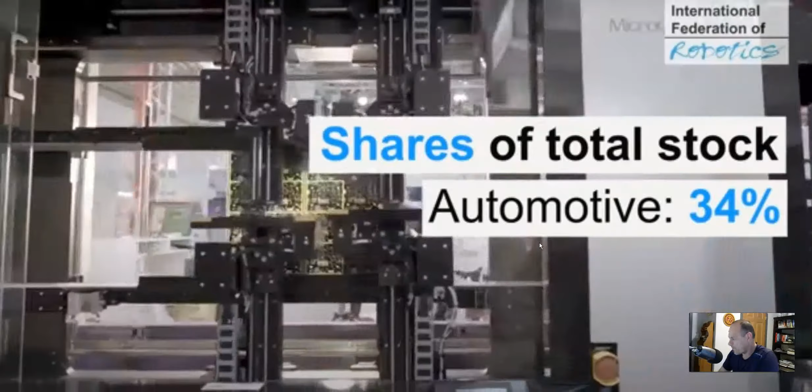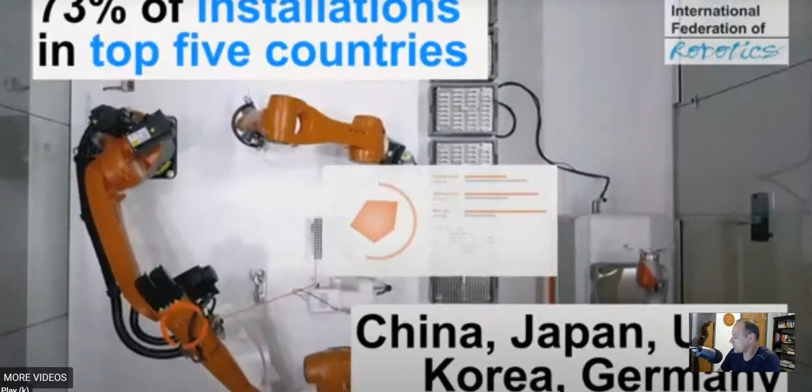More than 2.7 million robots operating in factories around the world. Automotive stock 34%, 25%, and automation value of new robots is 13.8 billion. China, Japan, USA, Korea, Germany - 73% of installations in the top 5 countries.

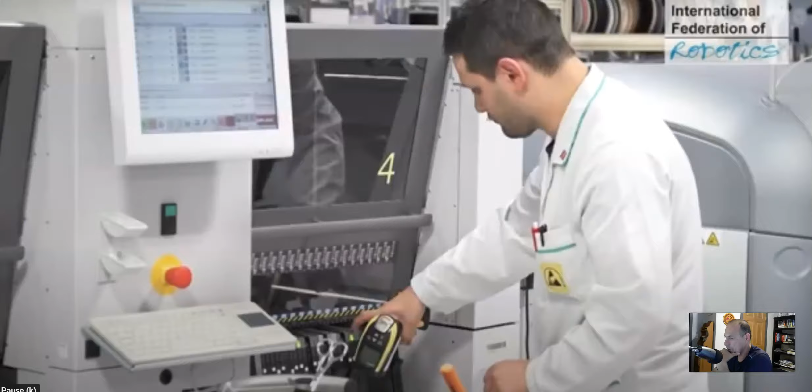Cool stuff, isn't it? Robot density worldwide in the manufacturing industry is 113 robots per 10,000 employees. That seemed like a lot, but they assist, right now they're assisting production lines.

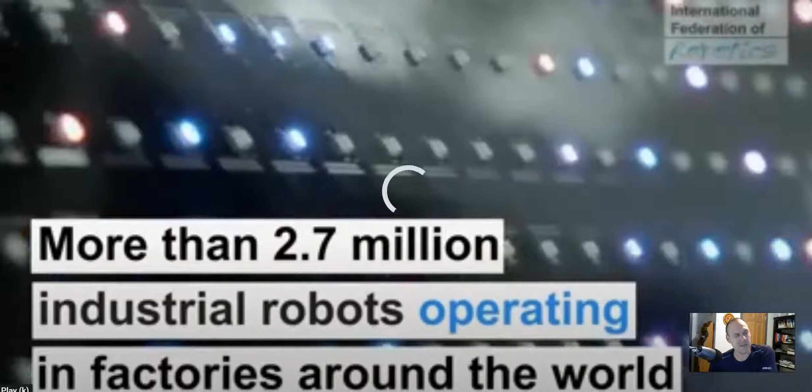Most of the time they're not, though. I did work with Ford, as a production supervisor on the Ford 500 production line, and we made the A-pillars. We had 16 robots on that line that assembled the A-pillar. So, lots of robots on that line, but that's not common. So I had to stop it and start it.

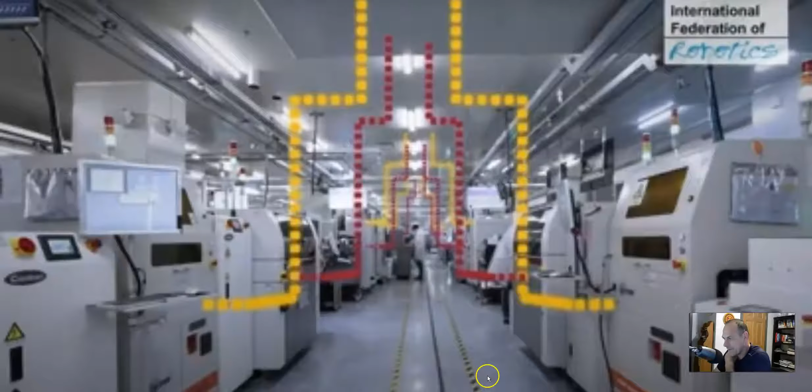So robot density, top 5 countries - we can name them: China, Japan, United States, Germany, Sweden, Singapore. Okay, Singapore, I stand corrected - Singapore or Japan. All right, so a short little video there, pretty interesting stats.

So I like to dig into this a little bit. What we're going to do is go down here to the presentation, I think it's a good place to go. This was put out in Frankfurt, September 24th, and we had a couple of speakers at that. So the IFR is a nonprofit organization since 1987.

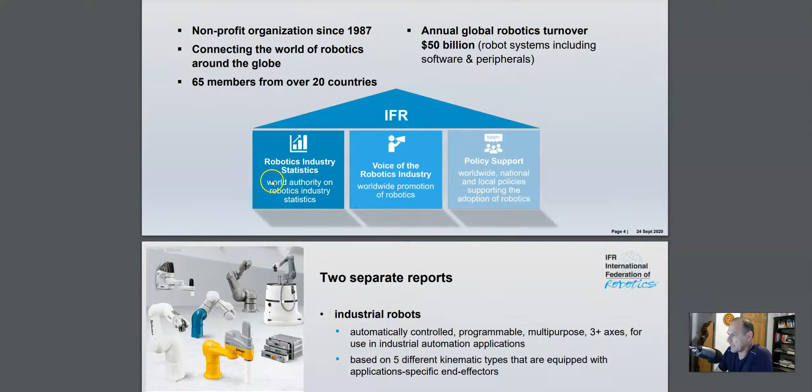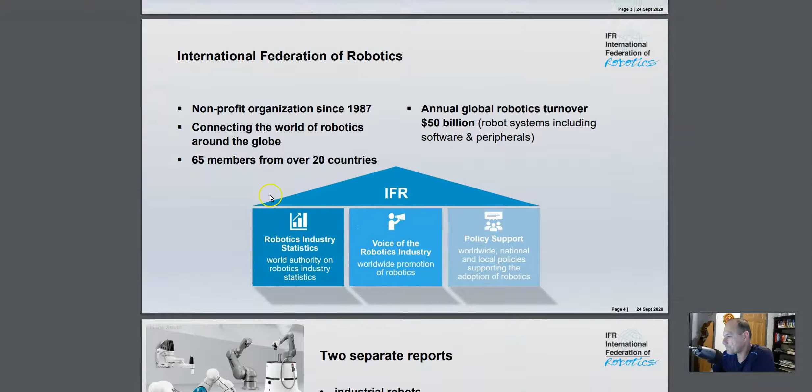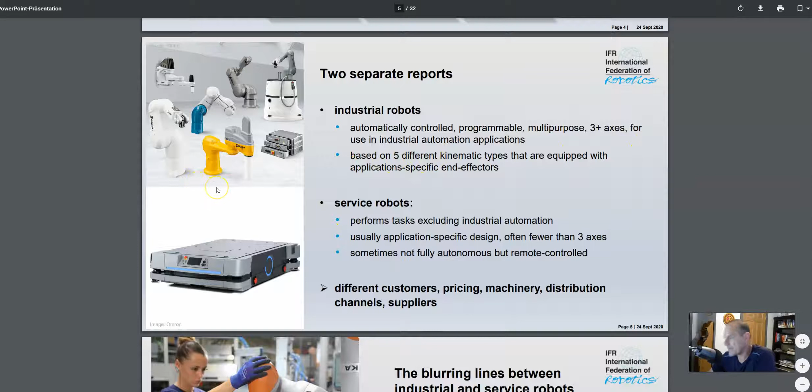Let's see, annual global robotics turnover is $50 billion - robot systems, including software and peripherals. Industrial robots are automatically controlled, programmable, multi-purpose, with 3 or more axes for use in industrial applications. Service robots - and this is really important that you understand the differentiation between industrial and service robots. I've made this point a couple of times in some articles I've written, but it's really important to understand the differentiation, as well as toys - there's a lot of toys that fall into that so-called pseudo-robotic world.

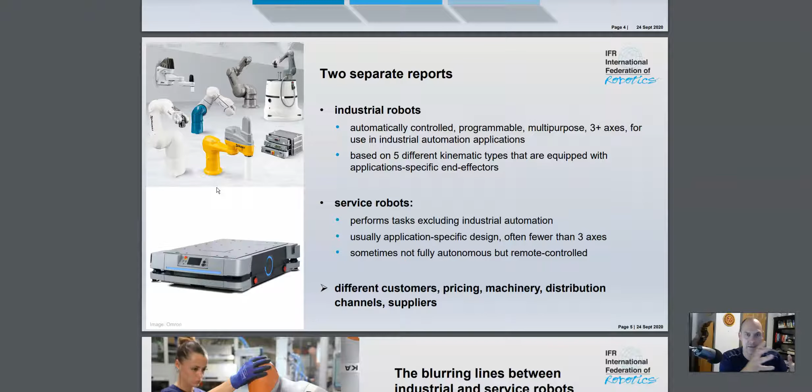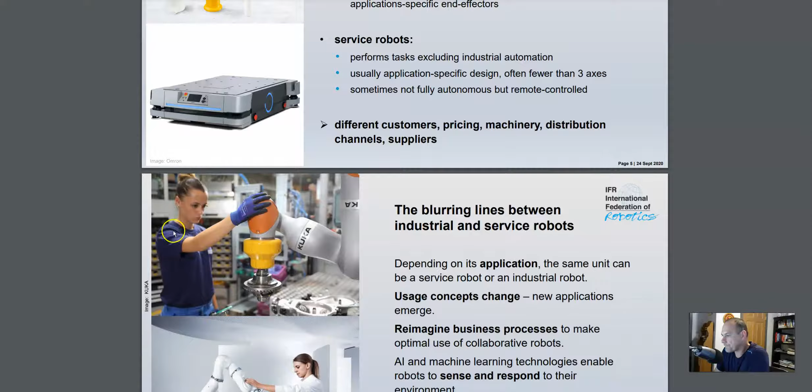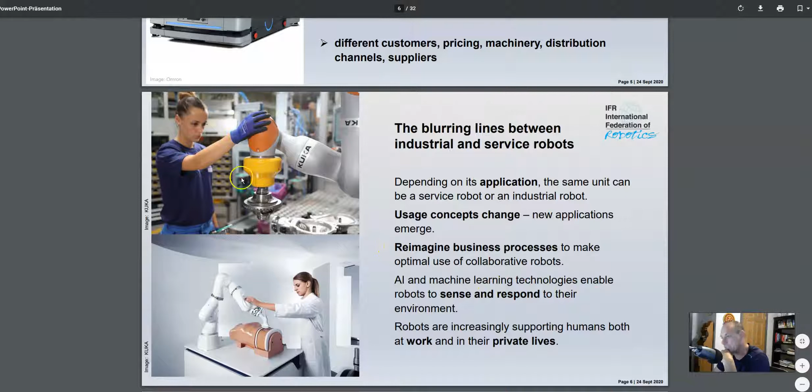But what I wanted you to focus on, at least for starters, is the industrial robotics. However, that should never exclude service robots, because they're getting to be very big. I did a video or article on automated mobile robotics - they put them on planes with arms that fold out between the seats, with ultraviolet light that gets down in the crevices of the fabric and kills bugs and viruses. That's pretty cool, especially in these days of pandemic. That's getting popular, and they need to be programmed. So the lines between industrial and service robots are blurring - depending on its application, the same unit can be a service robot or an industrial robot. Interesting, I hadn't thought about that.

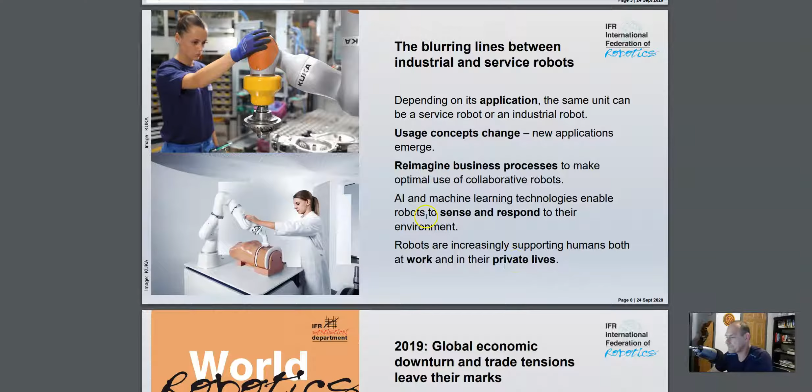Reimagine business processes to make optimal use of collaborative robots. Collaborative robots are designed to work very, very close with humans. Matter of fact, if you just gently bump the collaborative robot, it will stop instantly with virtually little to no chance of injuring the human being. It's really very cool stuff. I got to do a little programming and play around with those when I went to FANUC programming school.

2019 global economic downturn and trade tensions leave their marks. Robot stock: 2019, there was 2.7 million units, up 12%, as we mentioned. New robots, 2019, 373,000 units, down 12%. So kind of went over those numbers.

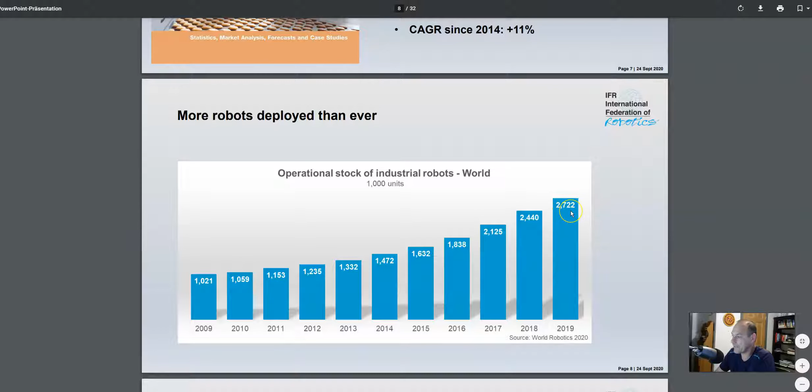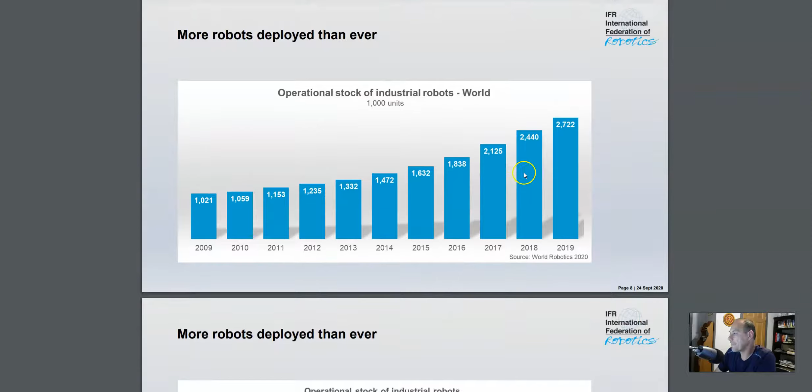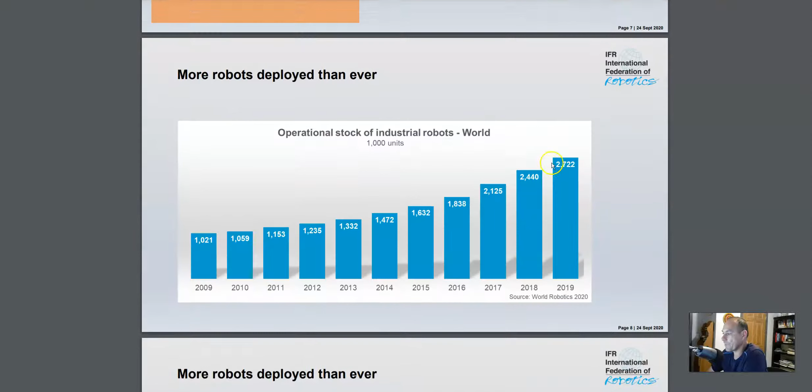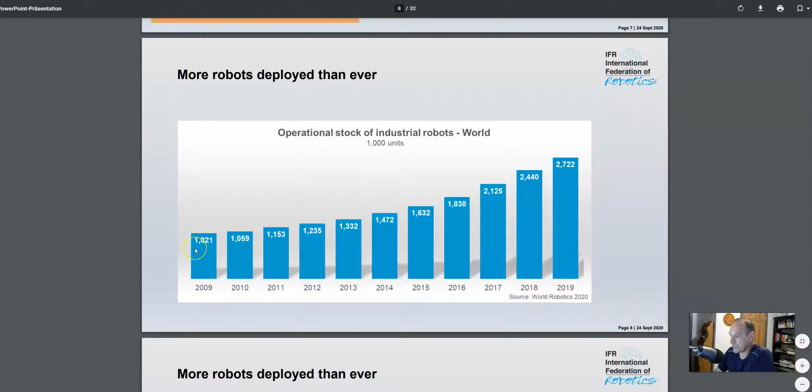Operational stock of industrial robots - you can see the exponential growth, more robots deployed than ever, anywhere from 1,000 units now we're at 2,722, that's 2,722,000 units, or 2.7 million units. That's a lot of robots. So you can see this is exponential growth, not just a little bit, significant. Here in 10 years you can see an explosion in growth. That means opportunity, and more robots deployed than ever.

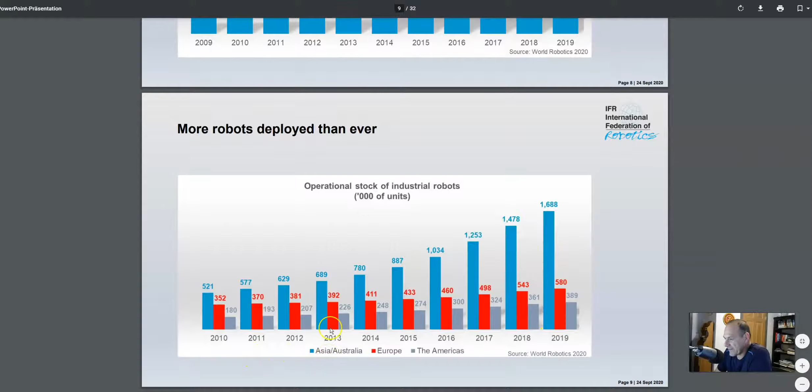And here are the countries: the Americas, 389,000; 1.6 million in Asia and Australia. That's a lot. Now we're looking at the industry.

The automotive industry is actually huge. Having worked in the automotive industry as a production supervisor, frontline supervisor, and as a controls engineer, it's a big industry in the robotics field. I know companies who have just started, engineering firms deploying automation and robotic systems in just the last couple of years. So it's very big - metal machinery too. It would be in your best interest to find companies servicing the automotive industry and electronics, because then you know they're going to be deploying robots.

Operational stock by application: handling, 1.2 million; welding, assembling, clean room, dispensing, processing, all other. So handling - pick and place type robots - welding being a little less than half of handling. If you can get a robot to pick and place, which is generally the first task, the easiest thing to learn when programming robots, then you've got the skill set. That's largely 1.2 million in application.

So for 2019, here they're just demonstrating the growth, it was going up. You can see there's some ups and downs here for different reasons. We had a downturn here just a little bit, and I could probably give you my best guess as to why - I think it was just a slight dip in the world economy, that's all.

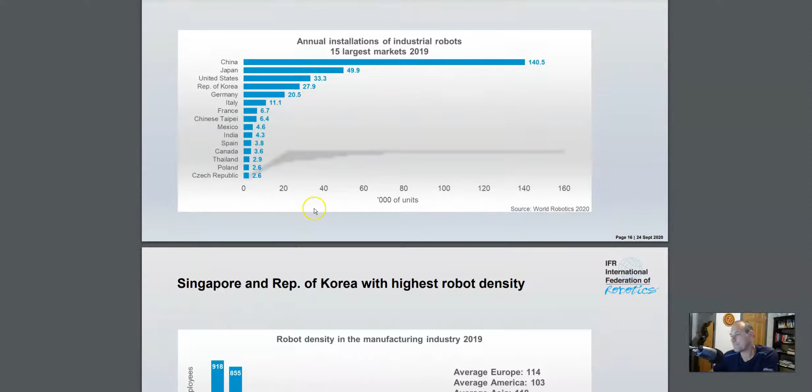Okay, annual installations of industrial robots by application, handling again. China remains the main end user of industrial robots. So we can see that 140.5 thousand, that's annual installations. Wow, they are just huge right there. But then again, China builds a lot of what the world wants, so it just makes sense.

Singapore and the Republic of Korea were at the highest robot density. So 855 robots for every 10,000 employees for Korea, and almost 1,000 for every 10,000, so almost one in 10 robots for every employee. That's a lot. The United States, interesting enough, is way over here, 228 robots for every 10,000 employees. So comparatively, we're nowhere near what Singapore and Korea are doing, but still plenty of growth opportunity, right?

Collaborative and industrial robots, so 2019, traditional industrial robots and collaborative robots. So we've seen some growth in collaborative robots here, 18,000. That's quite a bit of robots, collaborative robots. I think that's going to grow more and more. Collaborative robots are going to be the up and coming. I'll do a video on those upcoming.

Digitalization booster. So today, electronics industry seems to be winner of social distancing. That is an interesting point. With COVID, there's going to be the need for social distancing at 6 feet. There's going to be a big push to implement robotics.

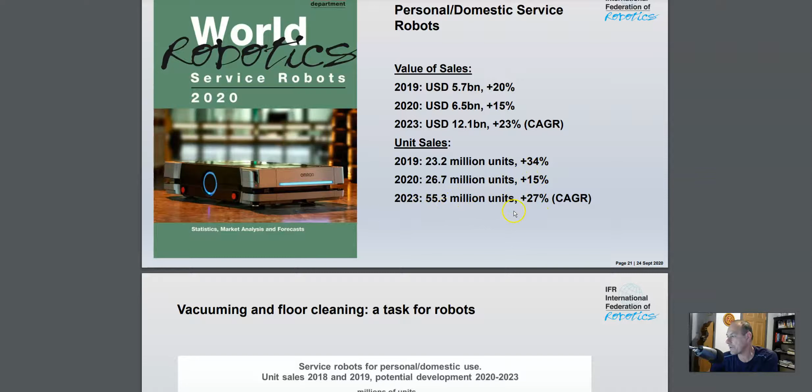55 million. Wow, I mean it's huge. That growth is huge. We're talking about vacuuming and floor cleaning, a task for robots.

But like I said, I've done an article on McDonald's deploying robots that cook hamburgers. We've talked about robots that vacuum and clean floors, and robots that go into airplanes and other areas to deploy ultraviolet light to fight COVID.

We talk about cobots that are safe to work around human beings, really completely safe, no guarding, no nothing. A tiny bump will stop that robot instantly, easy to reset. It's really a fantastic concept. There's a lot of that going on. It's really an innovative time for robotics.

So we get steady growth of turnover expected. Service robots for personal and domestic use, value of sales, 2018-19, potential development. You see a huge growth right here. Huge growth in billions. Notice this number, let's look at this number in billions.

This is fantastic because it really is fantastic. It's great. Great numbers. So we're talking about 10 billion, right?

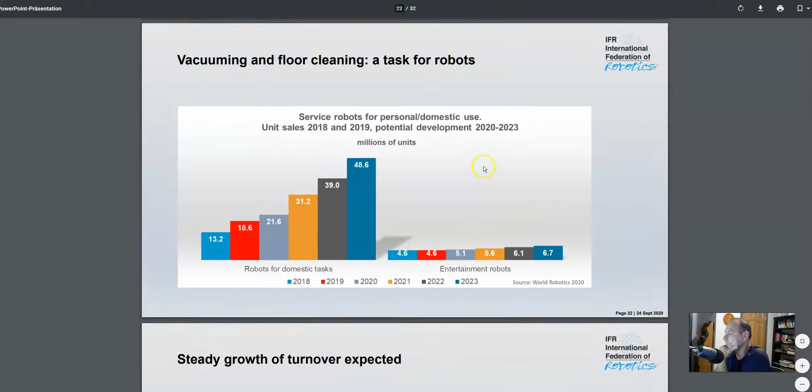31% 2023, world of service, professional service robots. So up here we were talking about world robotic service robots 2020. World robotic service robots, professional service robots, personal domestic. So in the commercial world is what we're talking about here. We're talking about growth of 26% in 2023, 24% in 2020.

That's actually very helpful. Robots and logistics are still the growth drivers. So again, what do we got? We got 259,000 units in logistics and robots for public environments and defense applications.

Logistics robotics, that's interesting. I'm not familiar exactly with how those types of robots are deployed, but that would be worth looking into. Professional cleaning is on the way to a top 3 application. So inspection and maintenance robots, professional cleaning field robots, empowered human exoskeletons. That's an interesting world as well.

I won't delve into it too much. We'll have to do a video on that. But let's keep going.

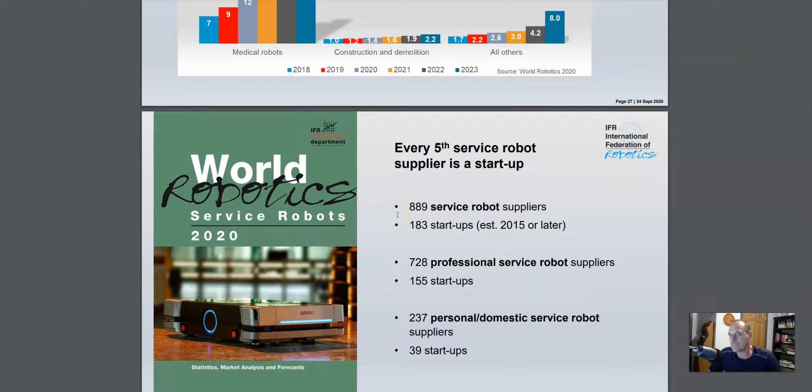728 professional service robot suppliers, 155 startups, 39 startups in the domestic and service robot space. So if you're looking for a new cutting edge company who would take on somebody who's new, you might want to start here. This would be a good place. It just shows you that there's opportunity here.

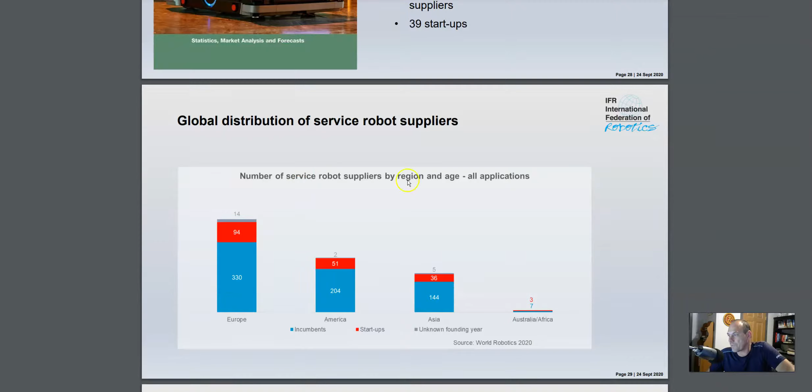Global distribution of service robot suppliers: Europe, America, Asia.

Technology and application trends: unbroken scale-up, logistics, mergers, acquisitions, heavy construction, cloud technologies. Yes, that's a big one coming up, we'll do a video on that. Remote procedures, surgical robots, etc. Business models like robot as a service lower the entrance level. Standardization and platformization: peripherals, app store, sales platform, plug and play.

Yeah, so this is just some comments, I think, about the industry as a whole. And that pretty much wraps up the presentation.

So now the cool thing about this is we actually learned some good stuff. We learned some really hopeful stuff. I hope you don't feel like I wasted your time. This is really helpful if you want to understand the robotics niche market.

Now, how do you get into it? You're new, you don't have a lot of experience with them probably. And one of the best things to do is, FANUC for example, FANUC Robotics, let's see if I can pull that up, Industrial Robotics, they have a training course.

Let's assume you work for a company that doesn't send their people to robotics programming because you may not even have any robotics. I would recommend signing up for their online training course, RoboGuide. Let's see if I can find this. I've spoken about this in the past. Now, it's a little expensive, and you'll likely have to do it more than once. So I would look at Handling Pro.